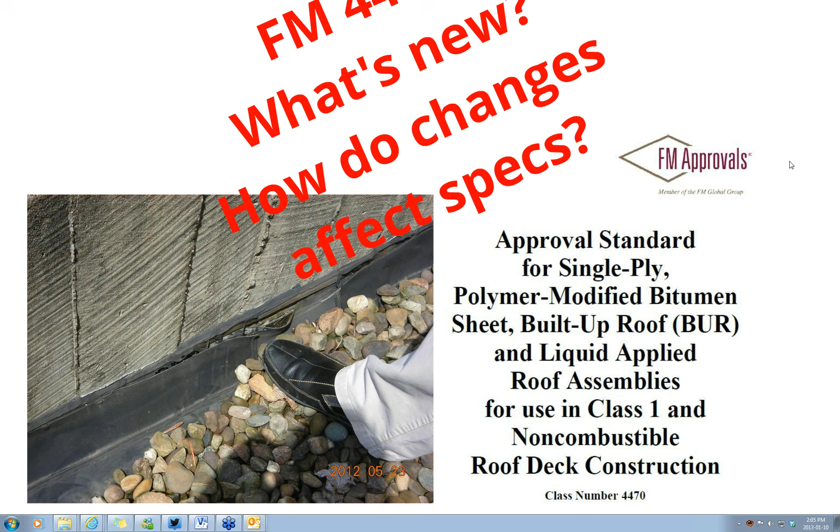And so what we're going to talk about today is how those things might affect us in terms of our specifications and even our contract administration.

Okay, all right, well let's talk a little bit about what FM is. It stands for Factory Mutual, and Factory Mutual Global is basically an insurance company, and they insure primarily large commercial projects. I haven't actually done that many projects that were insured by FM. I did do a few years ago actually a hotel in northern Michigan, but I understand that they're really big in the industrial market, and Dave has a little more experience, I think, with that than I do.

Yeah, we've done a good number of FM insured projects, but one of the things that we find is starting a project, when we first ask about the owner's insurer, oftentimes the architect is really unaware. And sometimes it's our question that even prompts them to find out that it's an FM insured building, which brings into a whole other play of review.

Yes, because not only does FM have certain standards for construction, and not just for roofs but for exterior walls and other things, they will actually review the documents and make comments on them. So all of a sudden you've got a whole new extra set of rules that you have to follow, as well as the code, and as well as if the owner's got their own standards for products and materials.

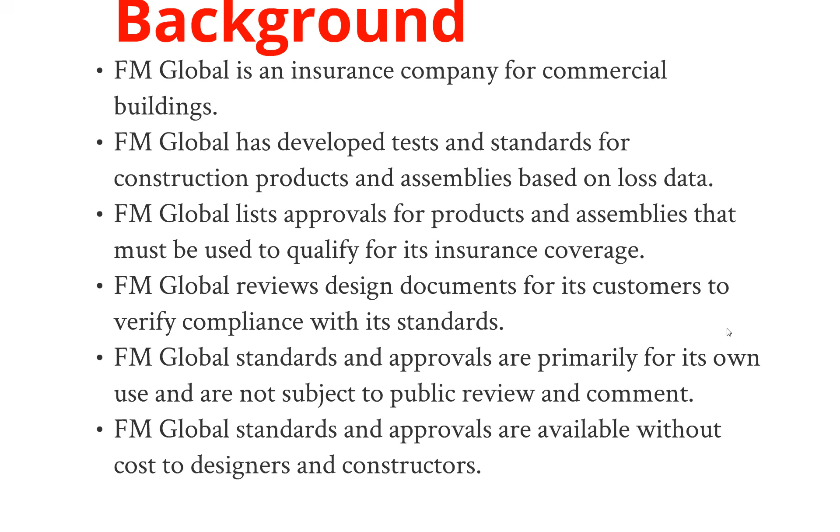And weren't you saying earlier that when an architect has a serious disagreement with an FM requirement, they can get it accepted, but it may affect the premium cost to the insured? It's all in a negotiation, isn't it? If the owner is unwilling to limit what may be a property loss, they're going to end up paying for it. So just because FM makes a requirement, my experience is that it's not necessarily cast in stone - you can negotiate it, but it may end up with an increased premium.

We have a comment, our first. From Ron Lincoln, saying that FM 4470 is referenced by the Michigan Building Code 2009.

Oh, that's interesting, based on IBC. Yeah, because it's not in the IBC. Well, he says it's based on IBC 2009. There is one FM standard that is referenced by the IBC, and right now I'm pulling a blank. I have it here in my notes somewhere, right next to my heart.

Quick! I hope you can find it. We'll see.

One of the things - because these are done for the benefit of a private company and its customers, these standards and tests and so forth - a few years ago FM actually sort of discouraged people who were not insured by their company from using the standards. Obviously, they couldn't limit it because they're fairly public, but they had mixed feelings about it. It's my understanding. But in recent years, all of the documents are available without charge on their various websites.

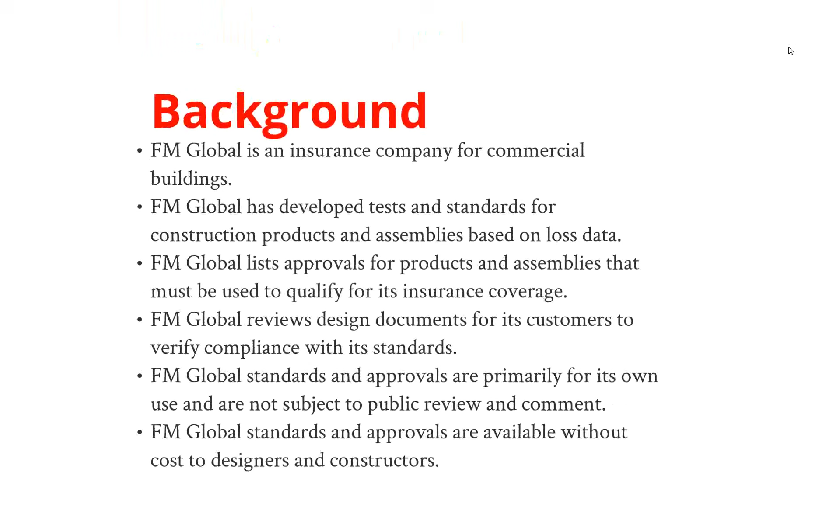It used to be the only way you could even get copies of the standards were through one of the insureds. So it's nice that they've been able to make them available for virtually anybody's use.

So here are some of the... Now, FM has a lot of standards that cover different areas. All the things dealing with roofing are in Series 1, or actually I should say construction. FM property loss prevention data sheets that start with 2 are for sprinklers, 3 for water supply, and so forth. There are actually 17 different categories.

And as I mentioned before, FM actually has multiple websites. We'll list them at the end of this presentation. The roofnav.org replaces the big thick book that used to be available that lists the approved roof systems approvals. And we might state that...

FM distinguishes between the term approval and acceptance. If it uses the term approval, that means a blanket general approval that you can use those products or that system in your construction and it will be insurable. Acceptance means there may be a departure from their normal standards, but they will accept or approve it on a case-by-case basis.

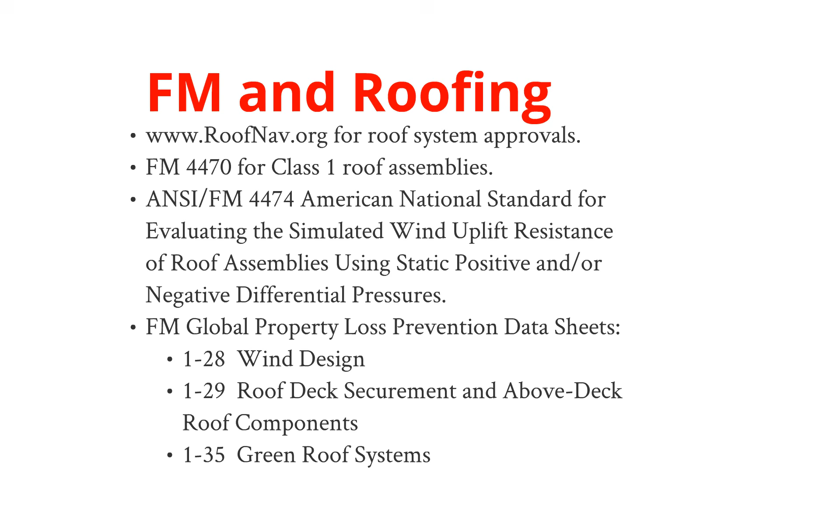Yep, and that one was a little bit controversial too, because it was withdrawn for a while and just came back again this last year. Oh, I hadn't heard that. Yep, they did some modifications on it and then reintroduced it.

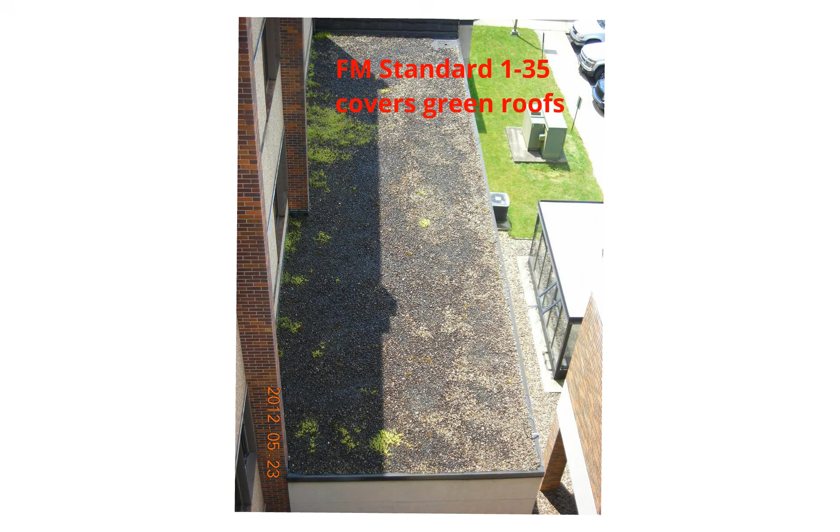Presumably it does not cover these inadvertently green roofs, as I'm showing here. I like that. Well, it's a hospital, and it gives the folks in the patient rooms something to look at. I see, other than a parking lot. That's great.

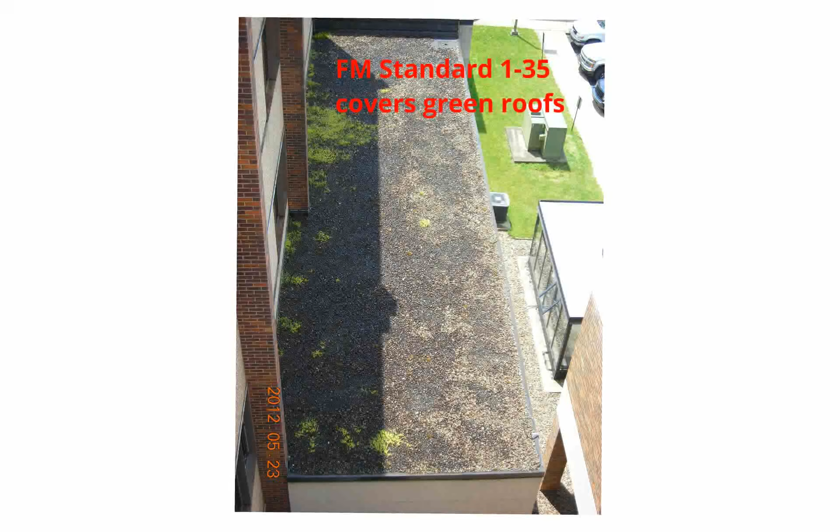Here's what the IBC requires in section 1504.3. That's the general area in which all the roofing requirements are found. You have to resist certain design wind load pressures per 1609, and that requires calculations by ASCE 7. The calculations involve taking the wind speed for your area, the terrain factor, the height of the building, and the importance factor. A hospital is more important than a warehouse, for example, and there's a rather complex set of calculations you go through to find out what wind uplift pressure you should be designing for.

Yeah, and there are some fairly simple programs out there. I know I found one that was essentially just an Excel spreadsheet where you can plug all the required information in, and it'll come back and calculate all the design pressures.

One of the things I struggle with as a specifier is that architects don't always understand the difference—if you look at the code and it says you're designing to a 90-mile-an-hour basic wind speed, that does not mean you need to be specifying an FM 1-90 rated roof. No, those two are not equivalent. The number for the classification for wind uplift is an arbitrary number that is not related to pressure or wind speed or anything. They just go in increments of 15.

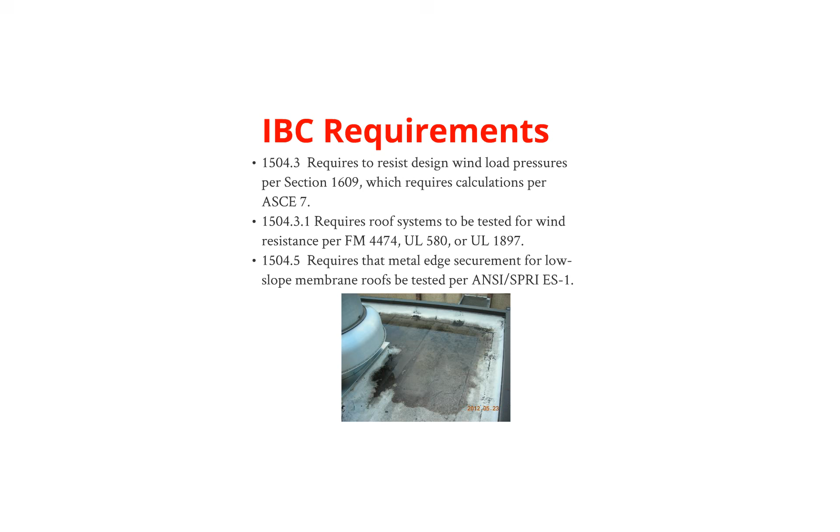Okay, sure. Right, let's see, we have from Robert Bowman. Also, some roofing manufacturers will calculate uplift, such as Garland. So there's a way to try to get the design pressures if your engineers may not be too willing.

We have another comment from George. And I think that's probably more common, especially on the larger projects, because if the manufacturer is going to be on the hook for 20 or 25 or 30 years for a no dollar limit warranty, they're going to look at that pretty closely, and figure out exactly what needs to be done. Now, they probably have a lot of that stuff pre-calculated, and they know what to do, and tell the roofing subcontractor how many fasteners to use at the corners, the edge, and the field.

Okay, we have another comment here from George Wadding, who's a roofing contractor, an estimator. Oh, great, a roofing contractor. And George, I would ask, are you on the phone or do you have a microphone available? If you are, we'd love to get you on the line and have you present your question and help open that up for discussion.

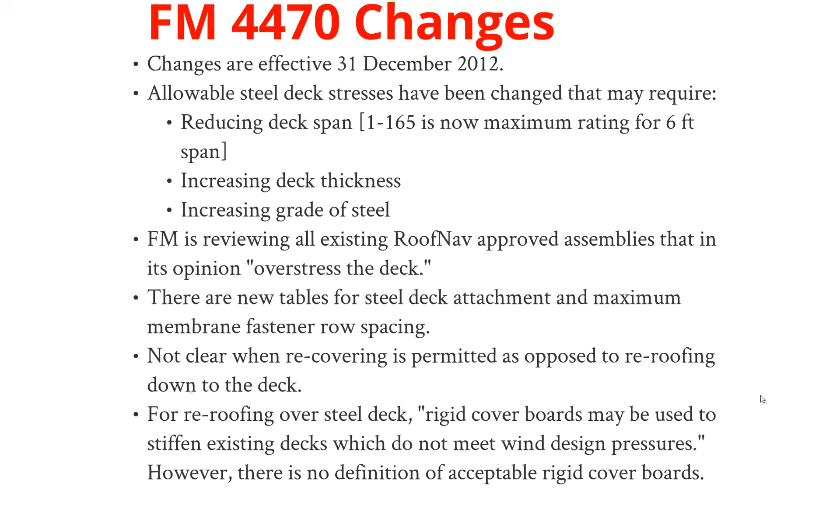Right, which is generally the design condition for 90% of the contiguous U.S. Yes, and the only areas above that are the Gulf Coast, the East Coast, and the Alaskan coast.

Yeah, and your house, David. And yes, and my house.

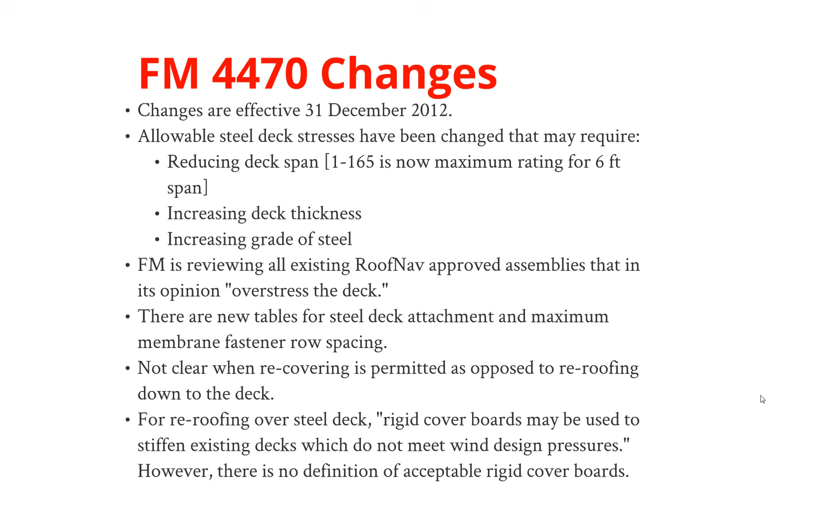So yeah, we ought to be at least aware that if we're specifying FM 190, that may be above and beyond where we need to be. Remember, that gets us a 45 PSF uplift, and FM 160 gets us 30 PSF, which for 2-3 story buildings under a 90-mile-an-hour design wind load is probably more than enough.

Okay, well, what do we do with this information? The first thing to ask... I know you're going to tell us. See if we can point some directions.

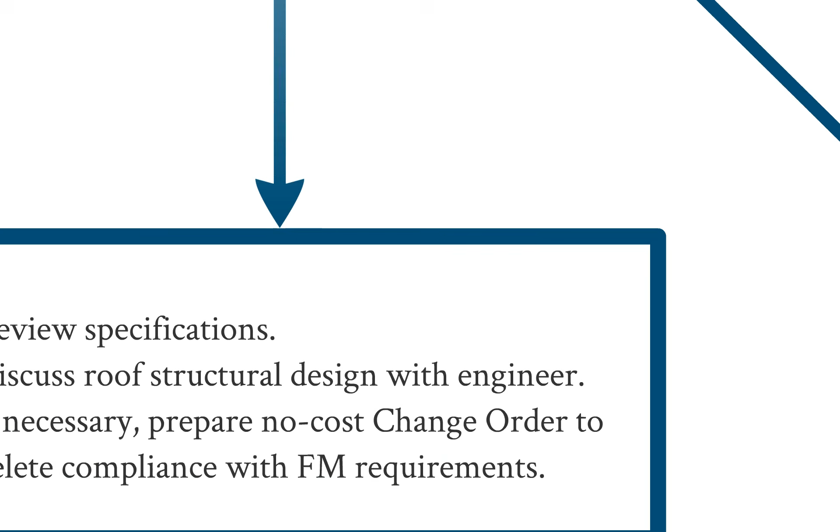The first thing is to ask ourselves, is it under construction? And if the answer to that is yes, we need to look at the specifications and see if we referenced the FM standards - they changed after the specs were issued, so there may be an ambiguity as to what's really in effect. You need to talk over the roof structural design with your engineer, and it may be necessary to back off on the requirements, because if it affects the joist spacing or the thickness of the deck, the owner and structural engineer may not be happy, and so we may need to write a change order omitting the FM requirements and going back to a different set of standards based on the ASCE 7 calculations and the manufacturer's recommendations for fastener size and spacing.

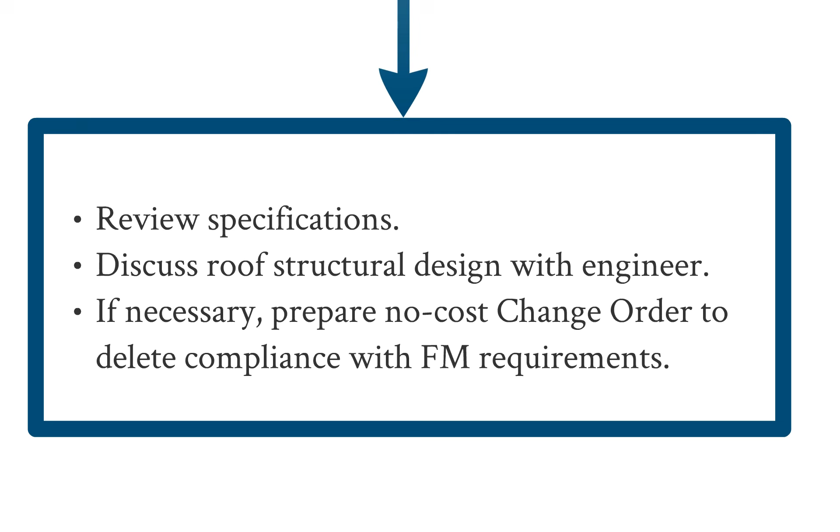Right, and since this all just went into effect, it's important to know where you stand on this. Yes, and that's what I'm really a little bit more concerned about than anything else - we wouldn't want anybody to get caught unsuspecting, because you're going to get a submittal and all of a sudden the roofer says, oh, by the way, your joists are too far apart.

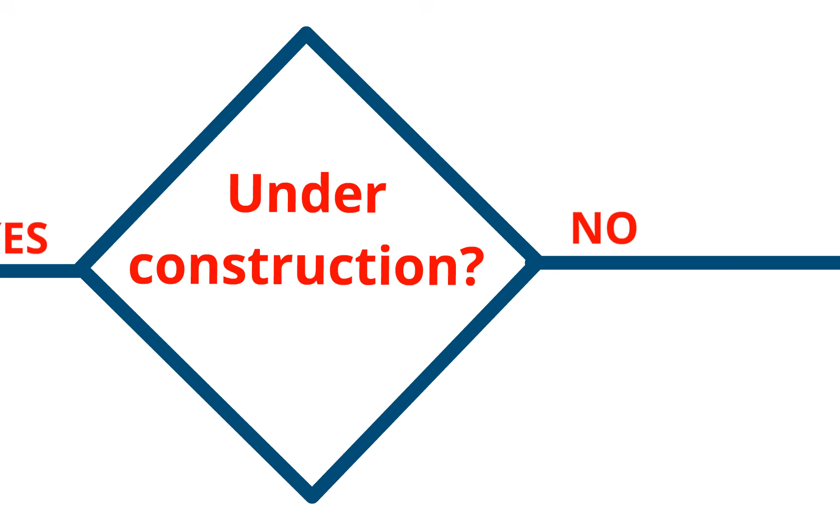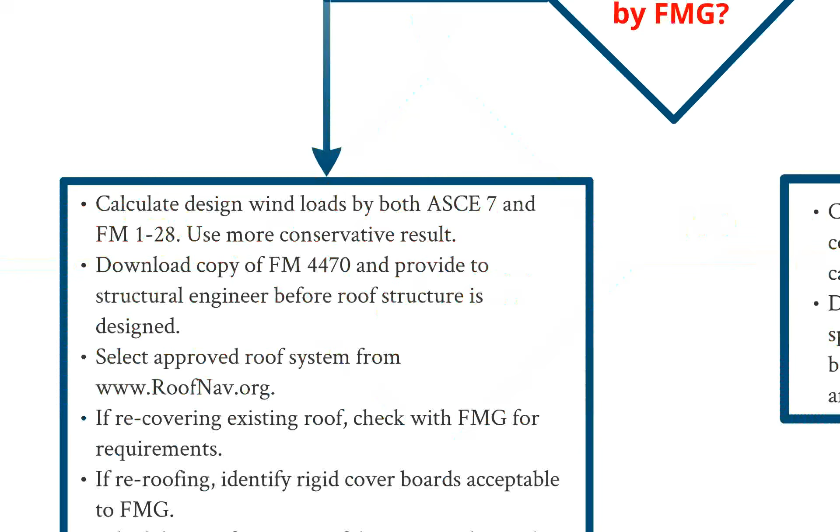If it's not under construction, then we ask ourselves the second question: is it insured by Factory Mutual Global? And if the answer is yes, then we need to calculate the wind loads by both methods and use the more conservative result.

We need to brief our structural engineers on the implications of FM 4470, check roofnav.org for an approved system, and if you're recovering an existing roof, you may need to have some discussions with your Factory Mutual agent to get interpretations, because the phrase 'rigid cover board' is not defined in the FM 4470, so you may have to call them and find out how they interpret that.

And of course, as we observed before, you need to build in some time in your design schedule for these things to be looked at by FM, and they are going to comment, and you may be required to make some changes.

Yeah, what sorts of things might classify as the rigid cover board, Louis? I suspect the DensDeck, Georgia-Pacific gypsum DensDeck, because that's stiff and you can get enough fasteners in that thing and it's not going to go anywhere.

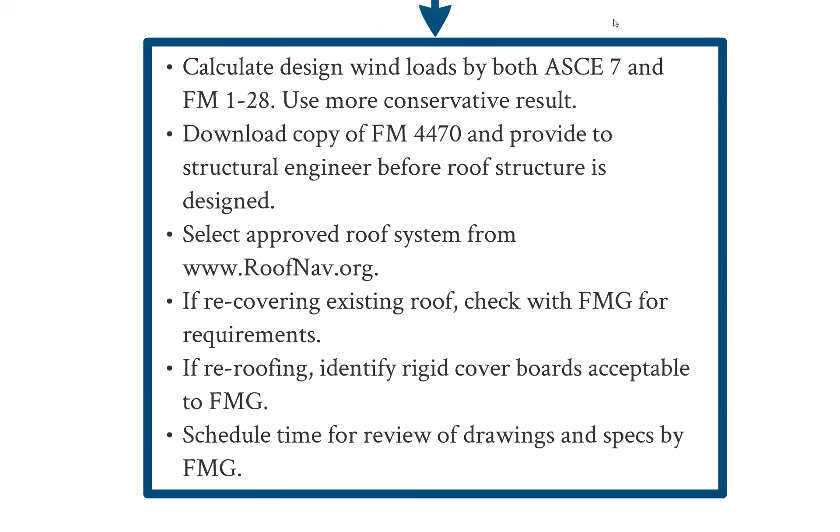And so if you have a continuous roof deck like concrete that doesn't leak air except maybe around the edges, it's a whole different ball game. It would make sense that if you're putting down a complete cover board and then covering that with a vapor barrier that would also act as an air barrier, then that becomes moot. Hey, I'm going to solve this whole thing—I think we ought to all just promote concrete roof decks and protected membrane roofs. Oh, I'll go for that. Then we don't have to worry about any of this.

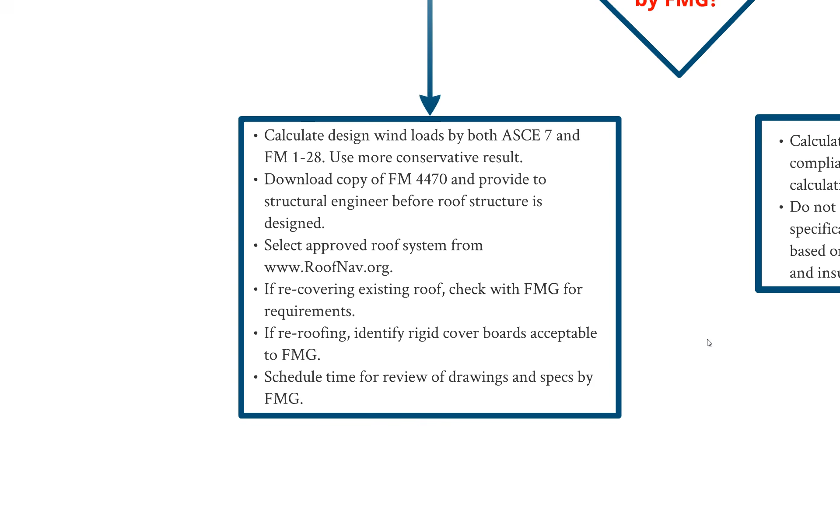I'll go for that. The firm I work for in Cincinnati used the T-Clear product a lot. That's the Dow styrofoam, and then a company called T-Clear applies a 3/8 inch concrete facing to it. The boards are tongue and groove, so you put it all together and it acts like this giant raft, and then you do have to do some strapping around the edges and corners, but it gives you a nice walking surface. The roof is protected from guys dropping screws and stepping on them, it's protected from UV, it's protected from thermal shock, and it's a great roof. Well, I do like the protected membrane because I think it does a number of things to help make it a long-term roof. But that's not the subject we're on today.

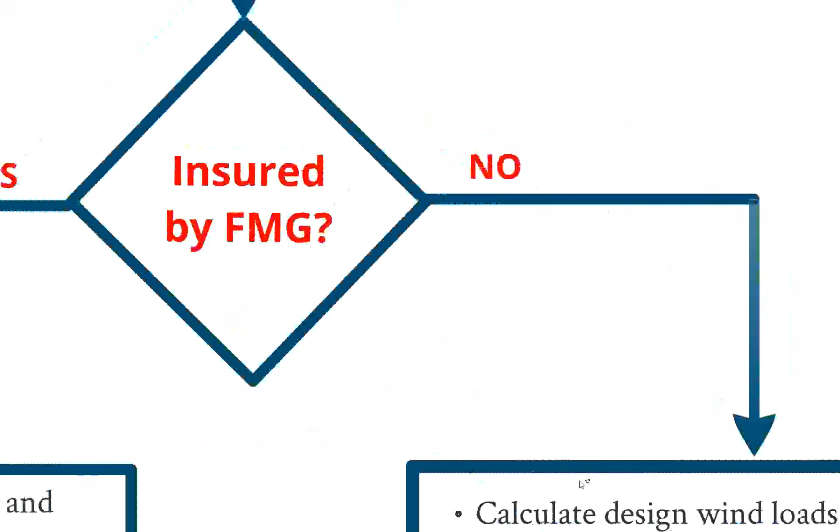Okay, so we ask if it's insured by FMG. If it's not insured by FMG, what should we do? Well, again, the code requires us to calculate by ASCE 7. If you really want to be conservative, you could also compare that with the FM calculations to see which is more conservative. And as one of our listeners suggested, there's no real reason to cite the FM documents in specifications if you're not insured by FM. As a matter of fact, that is the official view of the SPRI, the single-ply roofing industry.

Unfortunately, I invited their technical director to join us today, but today he's flying to California for one of their national meetings, so he was unable to join us. But he gave me his email address, and we'll list that at the end of the presentation if you have specific questions.

You can also just get on their website and download what they call an industry bulletin that talks about it. But again, if we're calculating the wind uplift pressures, and those are shown on the structural drawings, and we have performance requirements in our specifications, then we can put the manufacturer on the hook for figuring out exactly how many fasteners are needed to hold the insulation down on the metal deck so that it doesn't blow off.

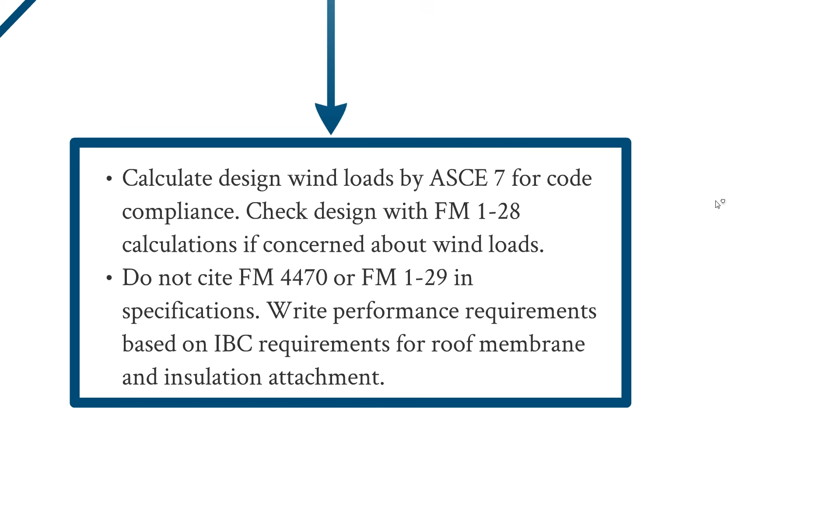Okay, but my point is, if we're relying on the roof membrane manufacturer to determine what kind of fastening pattern they need, it may take that back to the structural design to a point where you're going to have to add additional framing to accommodate that fastening pattern.

Yes, so all that says we need to think about roofs maybe a little earlier in the game than we're used to doing, and that was always true really. You should pretty well decide on your roofing system by the end of SD's, schematic design, because frankly the type of roof you use is going to affect the appearance of the building and other issues related to the drainage system design, the structural system design, and so forth. And you won't be able to complete your energy model unless you know what you're putting on the roof.

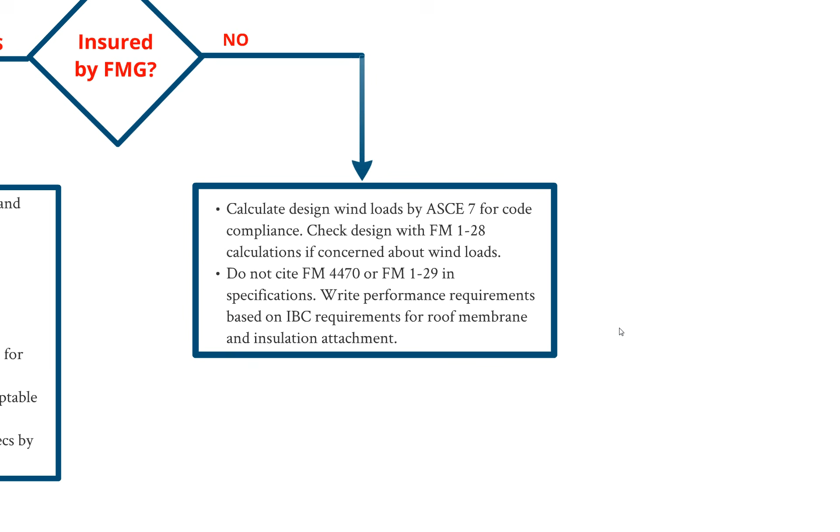Yes, and I see that Wayne backs you up on having done successful roofs over mission-critical facilities with fully adhered systems without fasteners in the insulation, if you have that substrate board. I haven't done that in years, so I didn't think about it, but you're absolutely right, Wayne, that's a good point, thanks for bringing that up.

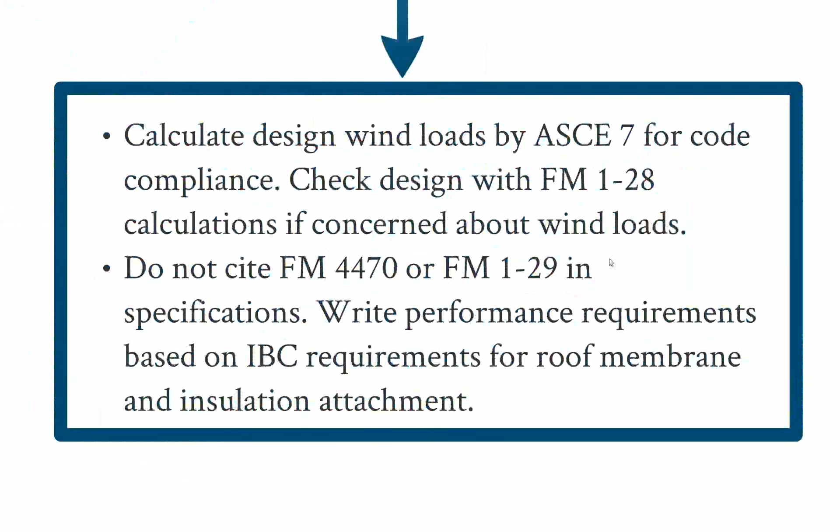I'm hoping that what I'm reading from George is complete agreement with protected membrane roofs over concrete decks. I think so. If I were a roofer, I would be much happier putting them down on concrete decks than otherwise, myself.

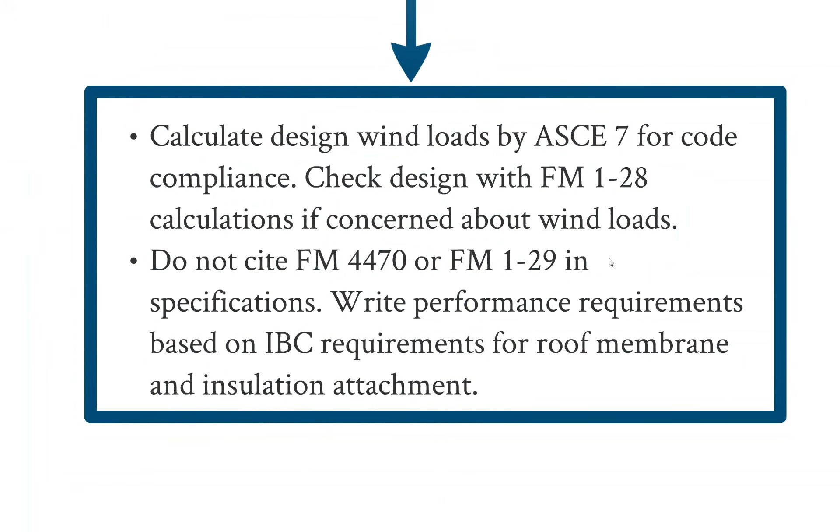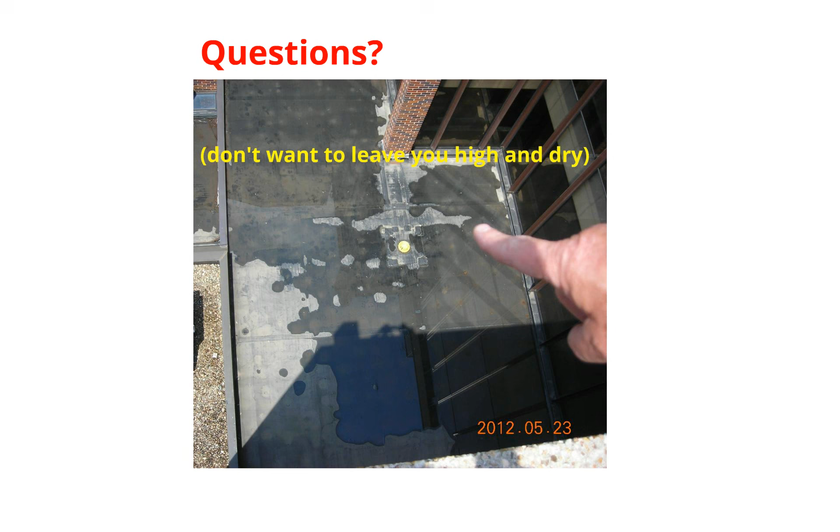One thing, of course, is to not put the roof drain on the column line. I was wondering if that was the drain in the middle of the photo. That yellow spot there in the middle of the photo is the roof drain. That's a great place for it, right on top of the beam. I don't know, I don't even know how they installed it. And you can see how effective it is - that was a day and a half after the last rain. Oh gosh, and we tend to laugh at it, but you see this kind of detail more often than you'd like to, for sure. I have some of the same photos myself.

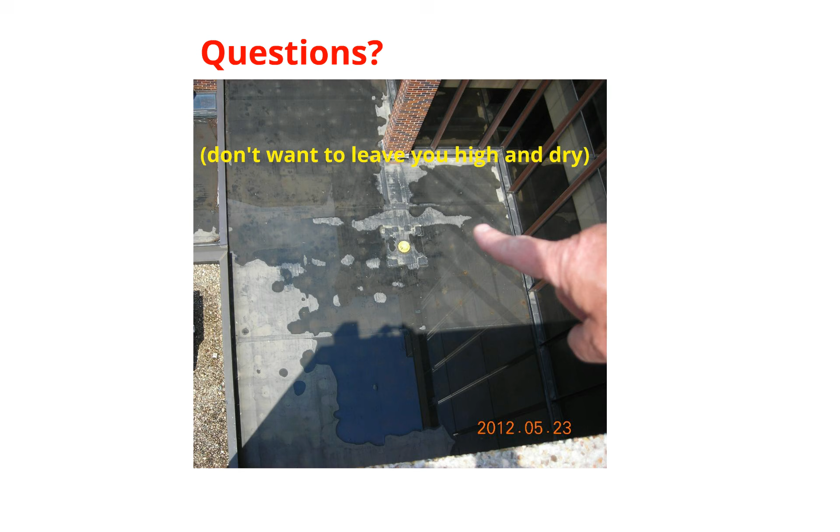So, was that it? No more questions? That's pretty much it. How'd you do that, Louis? We got to the end, we've answered all the questions. Nobody else is chiming in, the tweet chat is quiet. Paul Gerber ran out of things to say, and Tommy Smith too. I can't believe it.